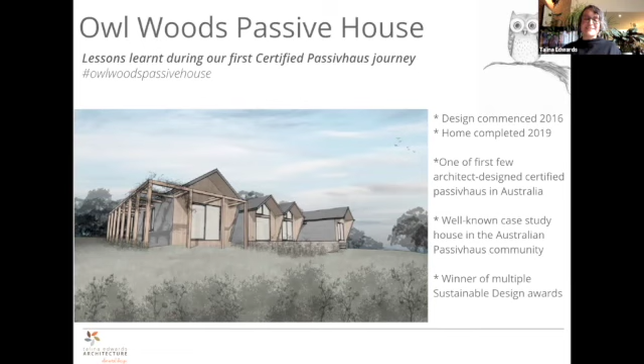Excellent, well I don't need to introduce myself, so thank you Prudence for sharing who I am. I'm really keen to share one of Australia's pioneering projects we were involved with. Design commenced on this one back in 2016, five years ago now - it takes time to do these things - but it was one of the first few architect-designed certified passive house projects in Australia. It's become a case study and we've received recognition for it, which is great because we can share the love and explain how other people can do this too. Some of the judges' juries said it raised the bar for what's achievable in sustainable architecture, and we really want the rest of the Australian industry to raise up to this standard, because if we can do it, we figure everyone can.

So I've got some challenges to share with you today - these are the lessons we learned along the way. The first one is about not being afraid to push the envelope, in terms of the site constraints, but also the building form and design.

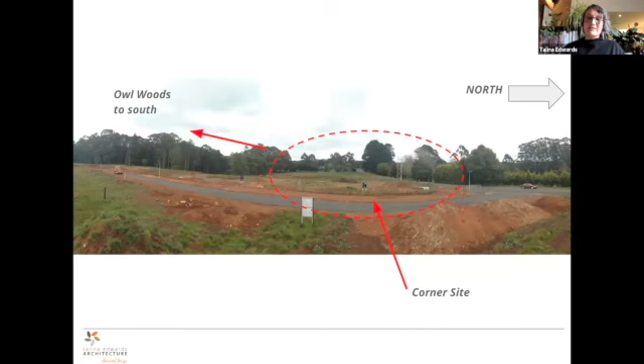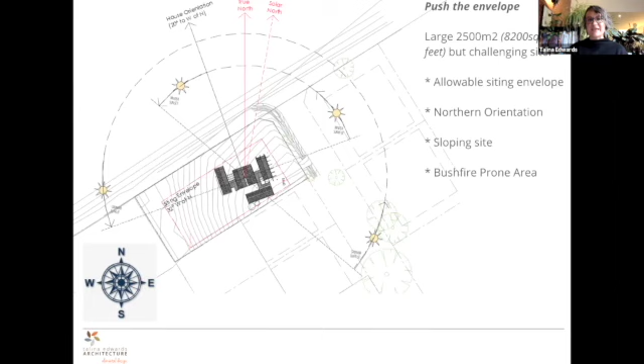The site we had was also in a bushfire-prone area. It was a corner site that was quite large, with woodlands to the south, and our solar access to the north. The challenges on this site were that it sloped from one side to the other on the diagonal, we weren't facing our optimal solar orientation, and being such a large site, we didn't want to just stick a little rectangular box in there, but really spread out and have outdoor rooms and garden spaces connecting to the landscape.

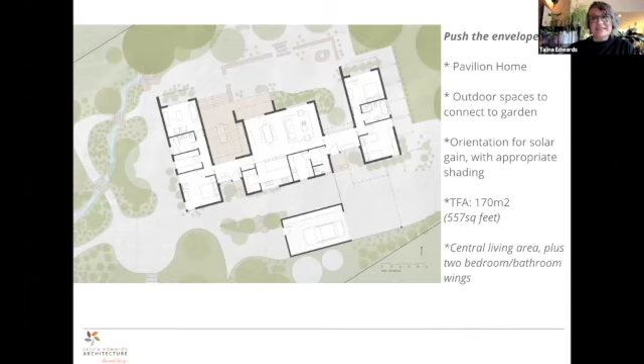So we designed this home as a solar passive design before we decided to turn it into, or aim for, certified passive house. So it's sort of stretched out - you'll see there's a lot of wall area. The interior, central section is the living area with two bedroom wings off to the side, and most of the services are grouped on the south in the middle because our solar orientation is to the north. Our treated floor area is 170 square metres, which is about 550 square feet, if I've done my conversions correctly.

At the end of our sketch design process, we approached a number of builders, the client and I, and that's when we met Stuart Lee, who was a certified passive house builder and had already completed a couple of Australia's first projects. We collectively decided he was the right guy to join the team. That's when we got on board a certified passive house consultant to help with our calculations, because at that stage I hadn't undertaken that training, but was super keen to see if it was possible to make this house a certified passive house.

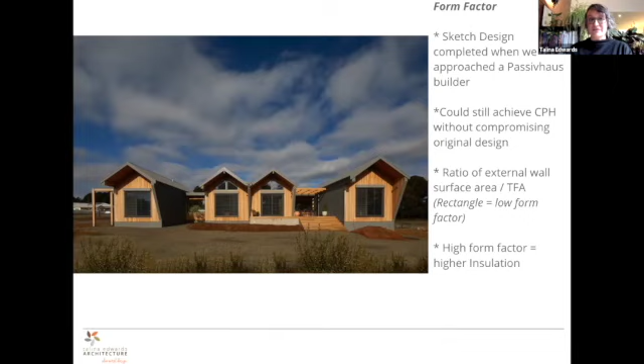You'll see all that surface area meant that we have not the best form factor, which meant we needed higher insulation, and we've got triple glazing just to make it meet the standard, and it was achievable. So we definitely pushed the boundaries of our own understanding of what sustainable means.

Coming from that solar passive background, we had to reduce the amount of glazing we had because we had too much, and we also had already chosen not to have any thermal mass in this project. The aim was to have less embodied energy. So the only concrete is the pad footings for the stumps, but the whole house is timber framed, so no thermal mass on the floor. And we did have an internal thermal mass brick wall, which we quickly scrapped because it wasn't actually going to give us much benefit.

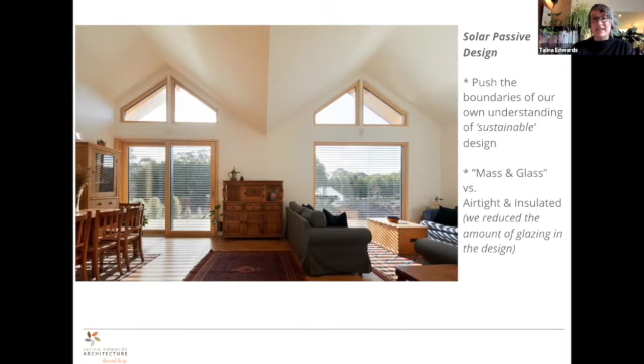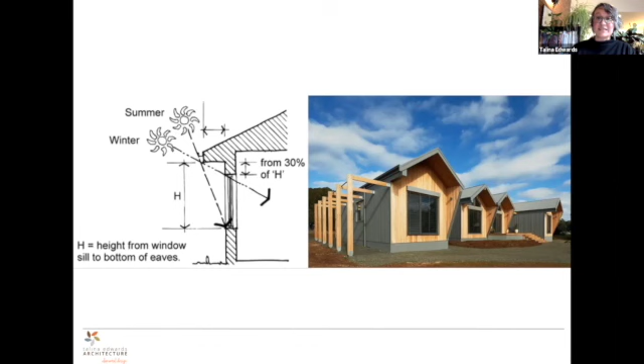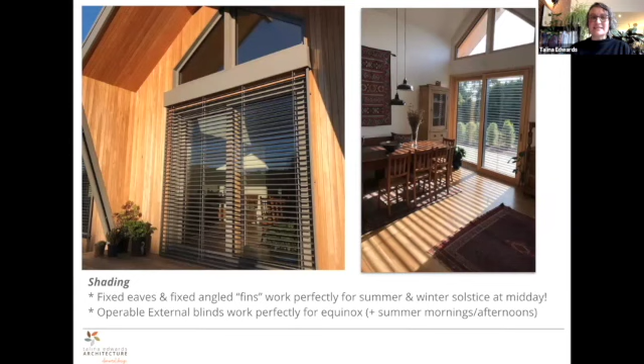So yeah, just some closer up pictures of what I've just explained about that. The learnings, and the clients love these and have really got to understand how they work for their lifestyle, which I'll explain a bit more later.

Lovely high ceilings throughout this living area, and then the kitchen and the rest of the house have got lower flat ceilings. The windows were definitely a big learning curve, ensuring that we didn't overglaze and had that balance, putting fixed windows where we didn't need them all to be openable, and they were all triple glazed, imported from Europe, and they're lovely.

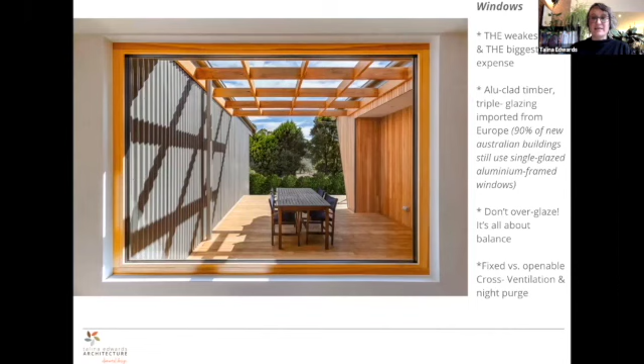Another shot of the inside. The corner windows out, so this is out to the south. For us, that's where we're losing all our heat and not getting any solar gain. And in the bathroom, the clients ended up putting some film on the windows, so we had to go back and check our calculations again because that changed the performance. And until the garden grows, they needed some more privacy.

With the build-up and the construction methodology, I'll talk about that with some construction details in a moment, but it was definitely a learning curve doing this as a timber-framed project, trying to do the standard construction detailing. This was the builder's suggestion, so we don't have a service cavity as such. All our airtight layer was outside the main frame, and the insulation was external to that. So our standard 2x4 frame became the service cavity, and we ended up with some extra insulation in here as well, but we did have to get the WUFI analysis done to ensure we didn't have too much on the inside of the airtightness layer.

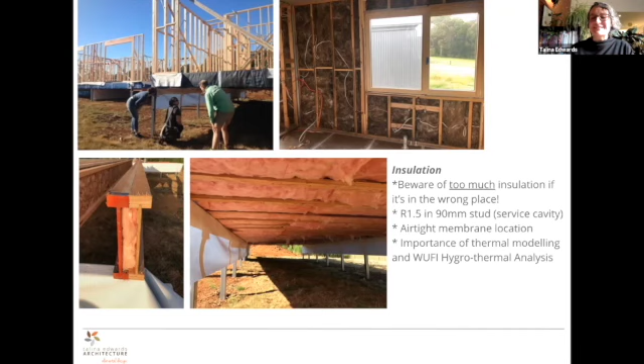Our subfloor insulation got installed early on, before any of the chipboard went down as the substrate for the flooring, and it was sealed up. Then it rained and got soggy, and the builder had to drain it all out. It dried out and it's all perfect now, but it was another learning for us all.

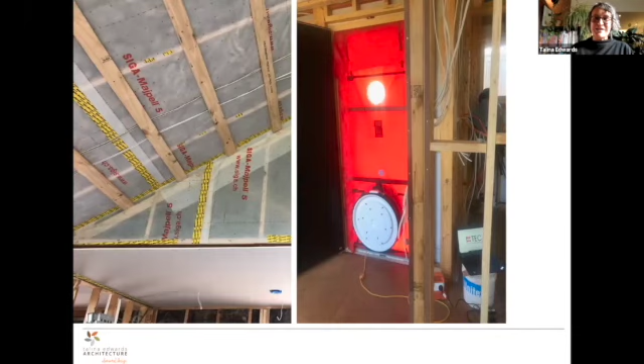We passed our blower door test with flying colours, and it was during construction that both me and my colleague decided to go and get our certified passive house designer training underway as well, because we were loving everything that we were learning along the way.

So that leads us straight into the second challenge of not being afraid to push out of our comfort zone. We really did extend ourselves to learn as much as we could, and absolutely embrace the generosity of the passive house community. We really did have to rethink how our standard construction details would work. Our typical wall is our standard sort of 90 mil frame, which is around that 2x4 construction, is my understanding.

These details show the blue as our airtight layer and the red as our external weather resistant barrier, which is vapor permeable. So that's a lot of what we're looking at with the standard detailing, quite a lot of insulation in the floor and quite a lot in the roof. It was the walls that were challenging, because there's usually room to fit more in the roof. With a timber frame floor it was easy, but this is so much deeper than what is standard. The walls are where it gets tricky and more expensive in our climate.

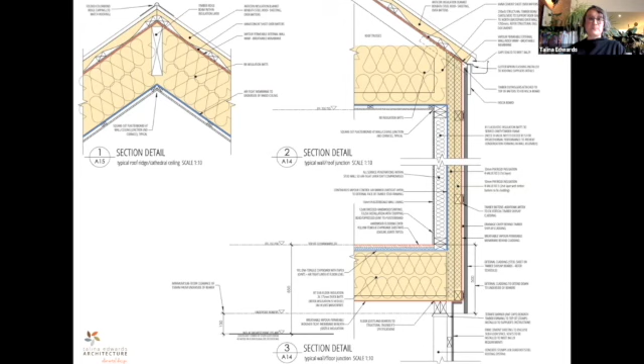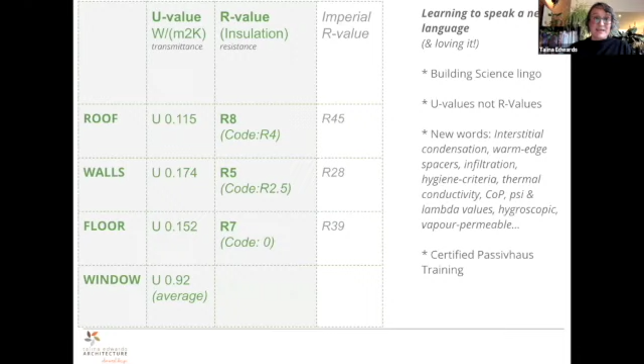In terms of us learning to speak this new building science lingo, we really did love it. For all the data nuts out there, I've translated the R values so you understand what we're talking about. Essentially for our roof we would double what the code requirement is, same with the walls. In the floor we actually don't have a requirement for that to be insulated at all. Most standard residential construction here in Australia is slab on ground, and in our climate they ask for slab edge insulation, but not necessarily underneath. For passive house, we absolutely are insulating our floor slabs or when it's timber framed.

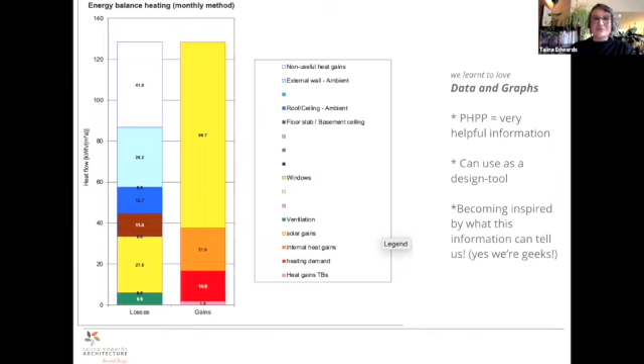We really got to love using the PHPP and understanding what all these graphs meant. It was really awesome working with a passive house consultant - for us that was Luc Plowman, one of Australia's 3 certifiers. It was really great to work with him and benefit from all his knowledge.

With the code here in Australia, we have a star rating system for houses, and 6 is sort of the standard you have to meet. By the time you get to 7.5, that's almost double the performance of 6, which is great to aim for, but it does not take into account air tightness. It's heavily focused on thermal mass, excludes laundries or wet areas, and single glazing is still allowed. It's based on building science, but it's not the same as passive house. So we get actual performance meeting predicted performance with PHPP, and that's what we love.

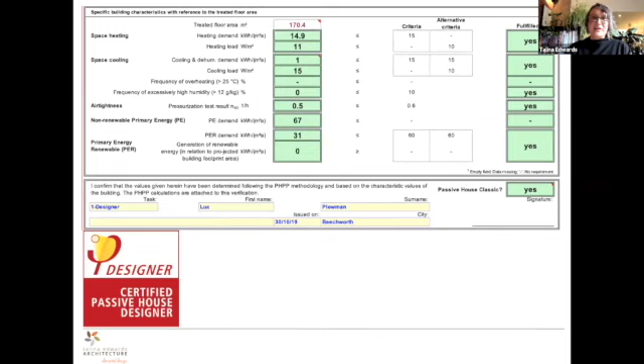Because we can give that reassurance to our clients that they're going to get what it says they're going to get. All the data is there for how we achieve this, and you can look it up on the passive house database if you like. We are ID 5851.

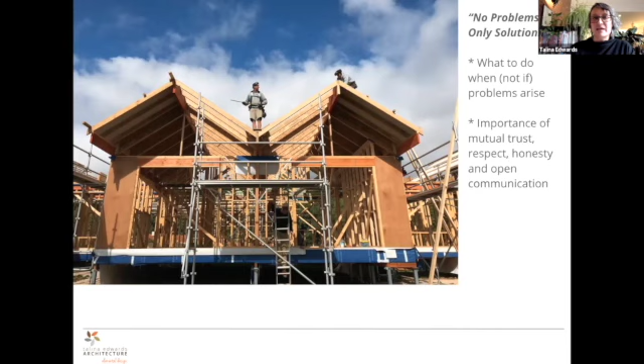For us, the collaboration of this project was one of the most successful things about it. We had excellent clients, a really great team of consultants. That's Stuart, our builder, from Enna House - he's changed his branding, but he's now one of Australia's most experienced passive house builders, because that's all he's doing and is in high demand. He was really great to work with because we all had this common goal, shared communication, and there was no such thing as a problem, because it was all about solving solutions and making sure we all had open communication, trust and respect. It was a really great working relationship.

That global passive house community is what we love, and what we love about what you guys are doing with the Accelerator, because learning from each other has been the best thing. We really feel like we've found our tribe here in Australia, and we love learning from what everyone else is doing as well.

Challenge 3 was about not being afraid to push your expectations, and this is again in 2 different parts. One is about the client's expectations and that post-occupancy evaluation and feedback from their perspective. The other is about the expectations of what a passive house is - will that solve the climate emergency? Is that as good as we can do, or do we need to be considering more?

These are our lovely clients, David and Yvonne, and this was their recent feedback about the benefits. They've been in the house a couple of years now. All the things about passive house in terms of comfort, humidity control and less energy use - they love that there's hardly any dust or bugs getting inside now, and that it feels quiet and solid. They do have a lot of sticky beaks coming past because this project received a lot of attention. People do knock on the door at times, but please don't go and do that without checking first if you're in the neighbourhood.

For them, it did become a bit of a Faraday cage because of the amount of insulation, but it's okay. They've got good Wi-Fi now and that's all sorted.

But what they've realised too is there's a sense of dissonance and a disconnect from the outside, because if they're inside and nice and comfortable and looking outside, as soon as they step out, they realise the weather outside could be quite different to inside, which is not the case of what they were used to, and what a lot of our homes are like here, where often the outside temperature is kind of similar to what's inside.

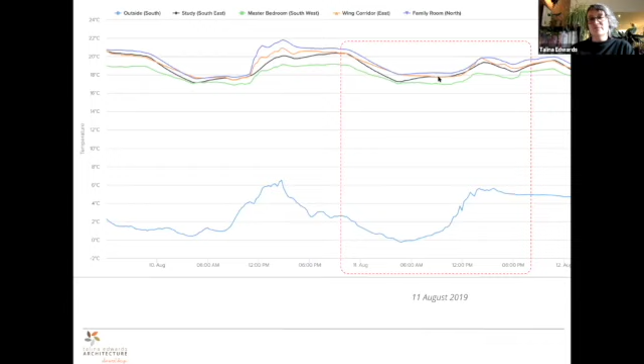And so that was some data from that day. Our clients do love collecting all the temperature data from inside. You can see down there the outside temperature got down to freezing just before, overnight before 6am. But inside it did remain comfortable - it dipped down a little bit lower than comfortable, but it's still that lovely range, whereas most houses would be probably quite uncomfortable.

Again, our clients collect all this data, and it was really helping them understand how this house was going to perform, what they needed to do, because the heating and cooling they have is a split system air conditioning, reverse cycle unit, the heat pump, and I believe last summer they didn't use it at all, maybe once - we did have a summer that didn't get too hot. And in winter, I think it goes on for an hour or two before they wake up in the morning to heat, just to take that edge off, and then it turns off and they don't need it.

So if there's a beautiful sunny day, they do open up all those blinds, but sometimes they've discovered it could get too hot. Honey, I boiled the dog - Yvonne was home on her own, and she accidentally locked the dog in one of the front rooms which receives all the sun. Then she came home at the end of the day and the poor dog ran out sweating and parched, desperately needing a drink, because it did get up to 30 degrees Celsius.

Quite hot for inside. And they realised that it really could spike to that temperature without any active heating at all, purely based on the solar gain coming in. So on those days, if they know it's going to be quite hot, they leave the doors open or potentially close some of those blinds, even in winter.

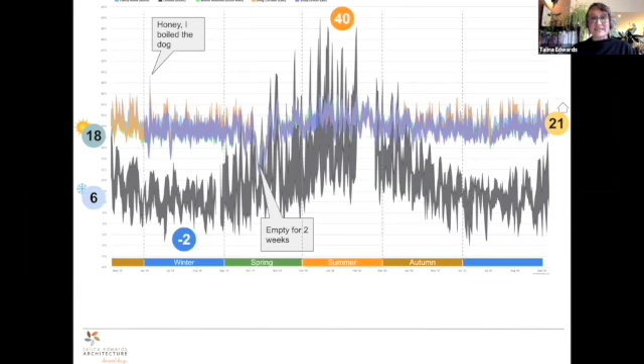So it's been really interesting hearing their feedback. David watches all the data because he likes to know what's going on, but that's him. Most of those early adopters in Australia have absolutely been the data geeks who really love this, but that's definitely been shifting now to being all about everyone understanding and appreciating the healthy home and the comfort, not just the data.

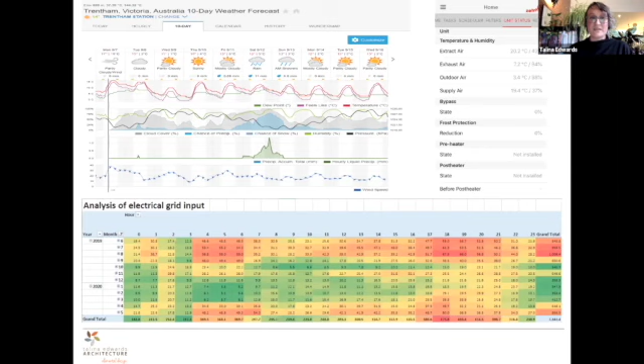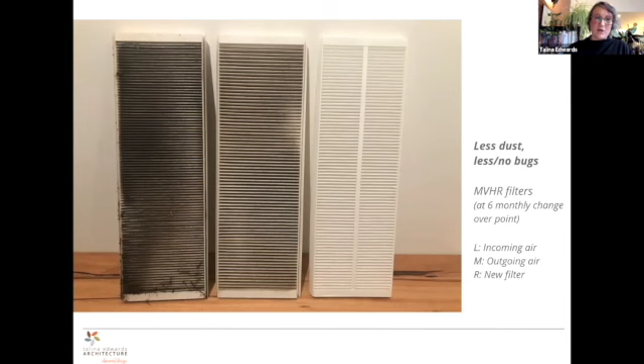They love that they have this evidence now about how the MVHR works and all the dust and bugs that's excluded from the home. During bushfire season, they weren't close to any fires recently, thankfully, but there was some smoke nearby, and their house performed really well compared to other homes in the neighbourhood. They love that condensation happens on the outside of the windows, not inside, which is often the case here. And their little hoist clothes rack in the laundry means everything dries really quickly.

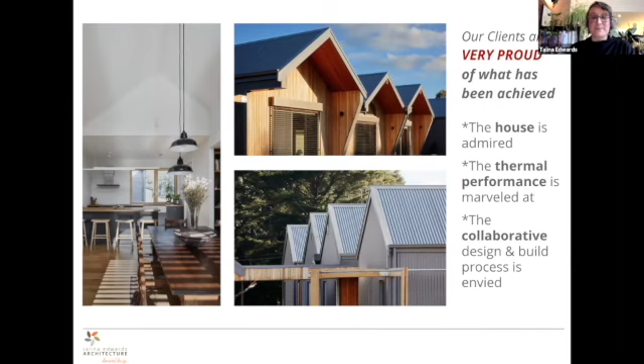The clients are super proud of what's been achieved. They love that their house is admired, but really, also that our collaborative process was envied, which is really lovely. We had a lovely experience.

So in terms of what we know, a passive house can be comfortable, healthy, low energy, quite resilient. They are all awesome things to strive for. But for us, we wanted to take it a step further in terms of biophilic design, choice of materials, connection to nature, the views out, and being able to step out into those gardens.

Water use as well, of course. It's an all-electric home, and they have put the solar PVs on now. They didn't at first - they wanted to understand how big a system to put on. We did consider embodied energy where possible - as I said, no concrete and mainly timber, the cladding being rough sawn timber, and the recyclable metal that doesn't need any maintenance.

And also for them, it was the adaptable, flexible use. So the 4 bedrooms don't have built-in robes - they can be used as a snug or a little sitting room, as guest rooms, as office. So they wanted that flexibility throughout the home. So really for us, it's this holistic approach - what else can we do beyond passive house?

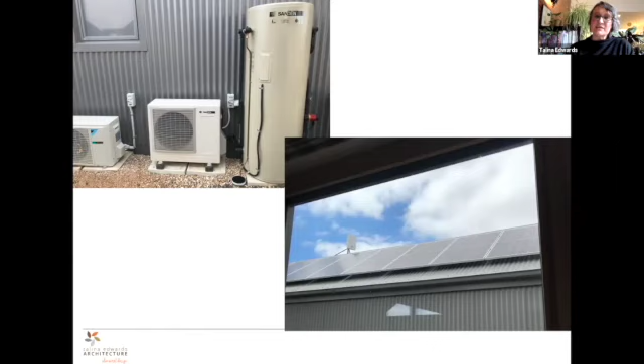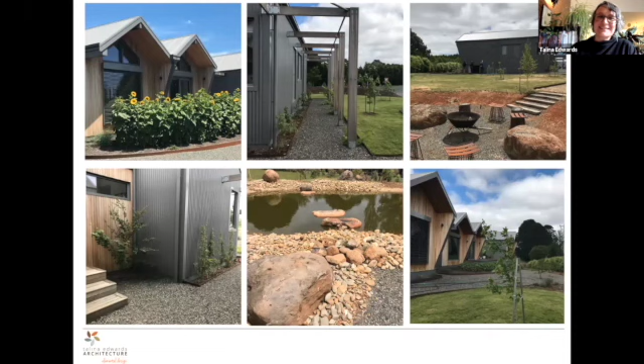So this was an all-electric home as well, no gas connection - that's the solar heat pump hot water and the air conditioning unit, and the solar PV array now on the garage. And that biophilic design has extended out into the garden. They've tried to increase the biodiversity and encourage local wildlife. They do have kangaroos come and visit from the nearby woods. They've got a billabong to try and increase that. So the garden's starting to take shape, which is lovely.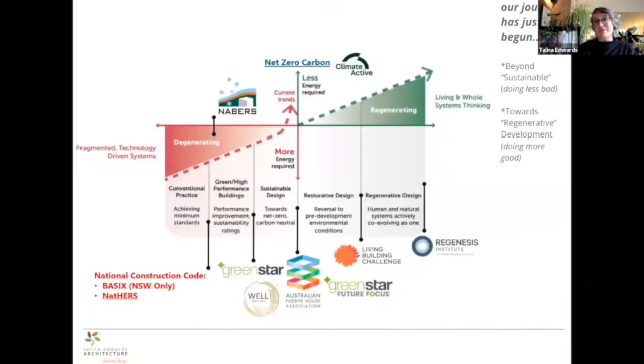And as I mentioned, for us, we know that being net zero carbon and passive house is absolutely where we would love the whole industry to be, but we're now keen on moving beyond just doing less bad, and how can we do more good, and what might that look like in the future.

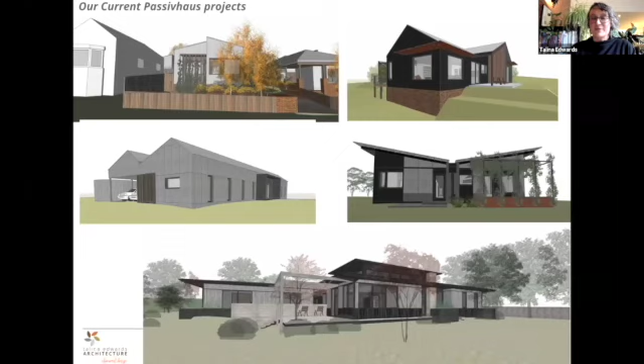So here's some of the other current passive house projects we're working on. Some are on site now, which is exciting, and others are still on the drawing board. We've got a bunch of different things happening, including a multi-residential development. We're only a small practice - we've got 4 women at the moment, so we're quite small, but we're also in the process of hiring. So we can only do so much, which is why we're keen on sharing what we've learned so more people can do this as well.

And we've also got a couple of projects where we're using straw bale prefabricated panels, again to reduce that embodied energy, but with much, much thicker walls. So it's a big jump from what the standard is in Australia to different ways we can achieve passive house. We haven't gone down the path of CLT or SIPs yet - we're about to look into SIPs for a project, but it's really interesting that at the moment we haven't found one right way to do things, so we keep learning new ways.

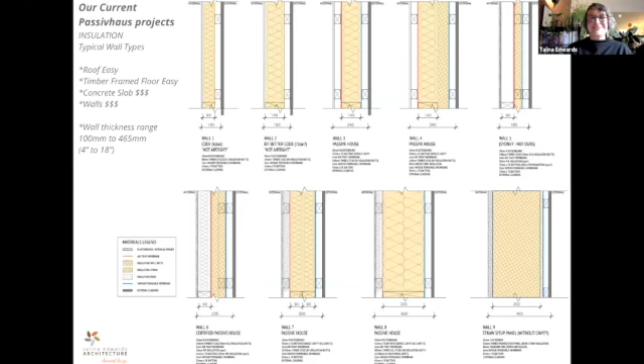As I mentioned, the roof's easy to deal with, timber frame floor is easy, concrete slab we're dealing with a few different ways, whether it's insulated underneath, or some of our current projects have got structural slab, XPS insulation on top, and then a non-structural screed or topping slab. But for us, that's 2 concrete slabs, so we don't know that that's necessarily ideal either.

Almost wrapping up here, as Prudence mentioned, I am really keen on advocacy in the community, so I love these opportunities to share and promote passive house to a wider audience, and I'm very involved with Architects Declare and helping spread that message. So for us, the awards were lovely, but that's not why we do what we do. It really is just giving us that platform to be able to talk more about Passive House. And that's also why I ended up on the board of the Australian Passive House Association.

Last year we were involved with pulling together this book of Passive House in Australia, and I'll put the link in the chat there, because if you're interested to see all the other amazing things that are going on in Australia, this book has 25 or 30 of our case studies from the first certified projects. I believe the current figure is 40 officially on the database, but talking to the certifiers, we know there are hundreds underway and in different stages, and also people choosing not to be certified as well. So there's a lot happening in Australia, and it's exciting to see where it's going to go.

And that is me. Thank you so much, Taina. That was fantastic. You're welcome. Did you have fun? Yeah, absolutely.